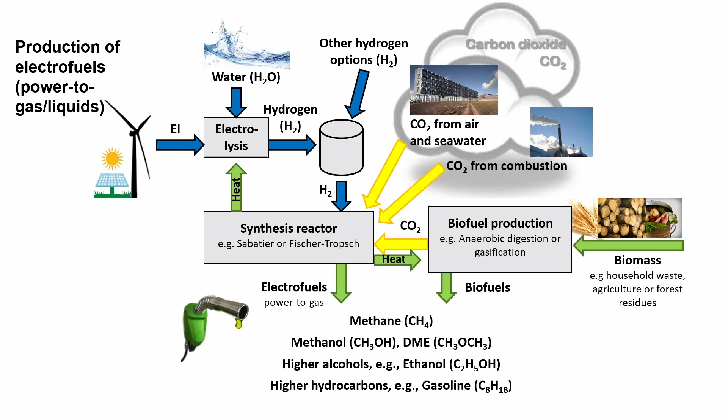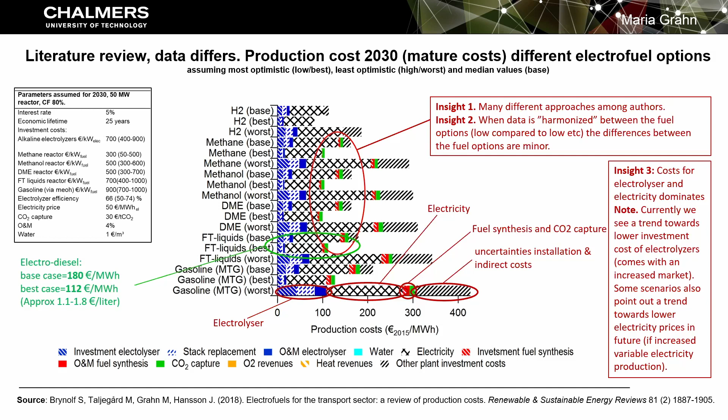And for insight 3, we can also see that those dominating costs for the electrolyzer and the electricity have a downward trend, so there is a great potential to reduce the cost in the future for electrolyzers and for electricity, which are the dominating parts.

Then in the same study we also made an analysis trying to understand the role of capacity factor. How many hours per year do you run your facility at full capacity?

So if you want to just have your facility running on what we can call free or excess electricity, maybe 10% of the year, you see that per megawatt hour of electro-methanol, it will be still a high cost per megawatt hour of the methanol, up to about 400. Whereas the more you can utilize the facility over the year, the higher the cost part, which is the electricity cost, increases per megawatt hour of produced fuels.

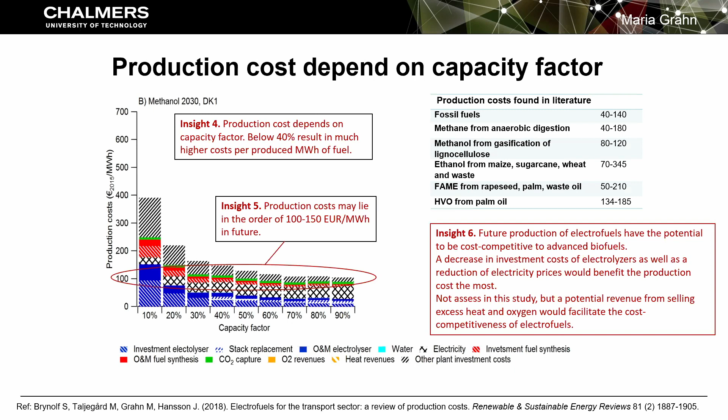But an insight is that it is relevant to have your facility running at least 40% of the total amount of hours per year to get the lower part of the production cost, and then it's phased out. So in this analysis here, around 100 euro per megawatt hour could be a future production cost. And then we compared the production cost with more advanced biofuels. So insight 6 is that we can see that they are in the same order of size as the more advanced biofuels.

So then I would like to share with you also some slides and some results from a recent study that we have done on the big picture, and that is, under what circumstances could electrofuels become cost competitive in the shipping sector? So here we are first comparing the different production costs, including also hydrogen and battery. And then we also include the total cost of ownership, so that we include the investments also in the propulsion technologies.

So what we're looking at are the combination of the different electricity sources, biomass sources, and the fossil sources for the different types of fuels, including methanol, but there are also DME and HVO and liquefied methane gas from gasification, liquefied biogas from anaerobic digestion of household waste. We have ammonia, we have the liquefied hydrogen, and we have electricity. And we combine them in 4-stroke engines, 2-stroke engines, battery electric, and also fuel cell electric propulsions.

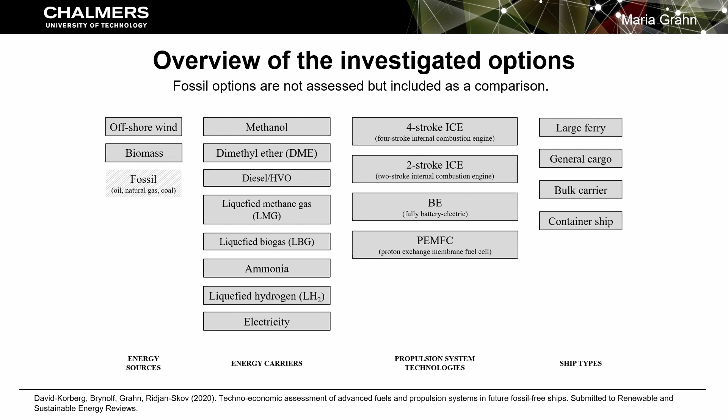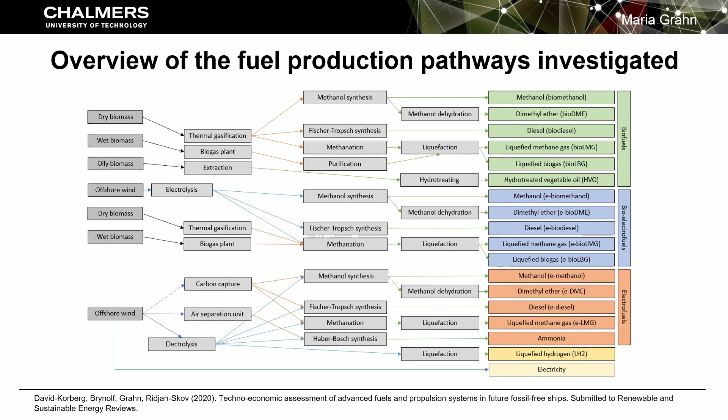And on the right-hand side, you see that we have grouped the different fuels into the green part, which are the biofuels. So we have biomethanol, and in the blue part, we have the kind of hybrid. So it's an electro biomethanol where we utilize the excess CO2 from the gasification and meet up with more hydrogen, so that we have, in the blue case, a hybrid fuel, electro biofuel. And in the more orange field here, we have the electrofuels, where we then have e-methanol as one of the options. And then we compare them also with the more yellow, in the end here, liquefied hydrogen, and also electricity in the battery electric propulsions.

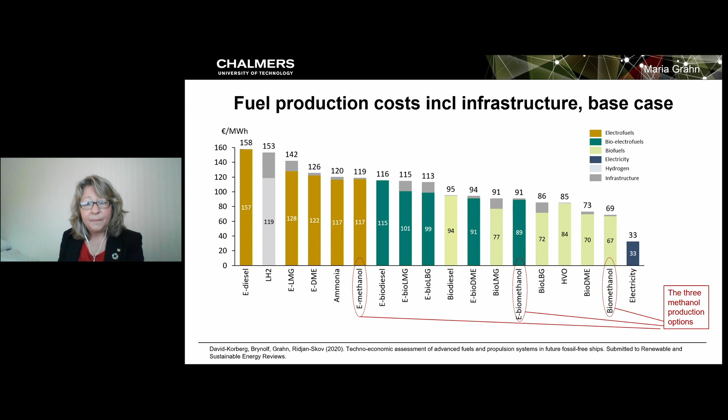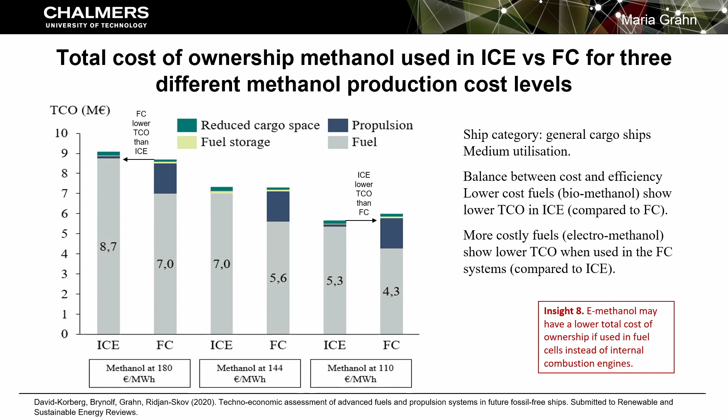On the opposite then, for the 2 last bars, if you have a cheap methanol, if you produce it from biomass, for example, then it will be the opposite, that the total cost of ownership will be lower if you run it in an internal combustion engine compared to the fuel cells, although they are not that different. But it is an interesting finding, I think. So that's the insight 8.

So very quickly, I would like also to show you 2 slides from an ongoing project that we have at Chalmers right now. So we have a hydrogen methanol case. It's an EU project called HyMethShip. So in this ship, we fuel the ship with electro-methanol. Then we have a reformer on board producing hydrogen. So hydrogen is used to propel the vessel. And then it is a possibility when you convert it into hydrogen to capture and store the CO2. And also the heat from the internal combustion engine can be used in the reforming process.

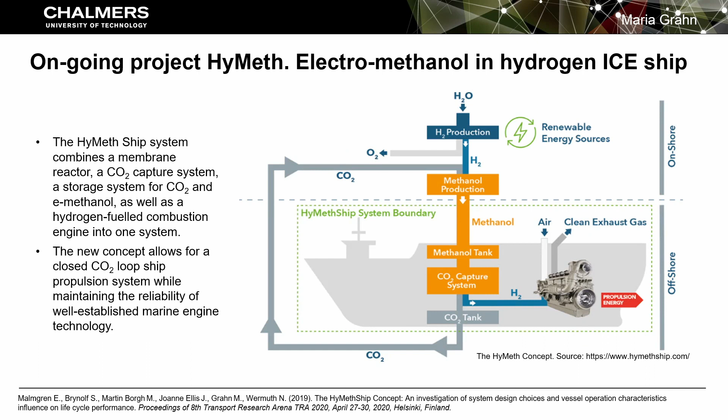So that makes more sense to have an internal combustion engine on hydrogen compared to fuel cells on hydrogen, since you need the heat for the reforming. But the point is that you can have the CO2 stored in the tank on board, and then you get to the shore and you can unload the CO2 and produce new electro-methanol. So it will be a closed loop of the CO2 in this case.

Is my time running out? I see you coming back now, Sebastian. Go ahead.

Go ahead. I have like 2 more minutes, if it's all right.

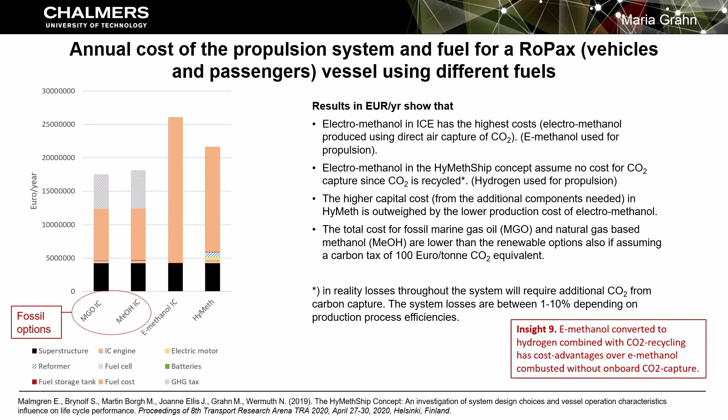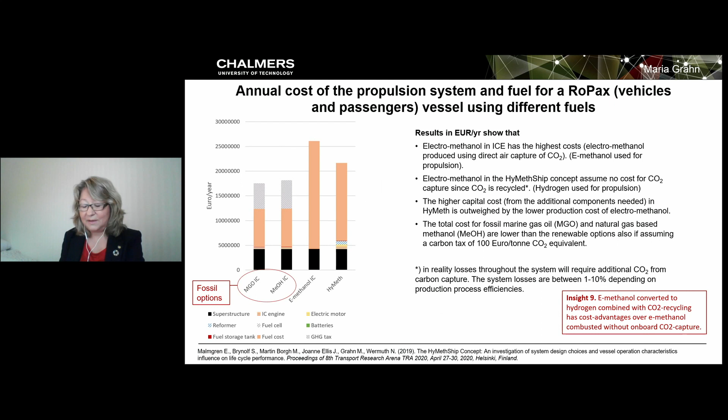And the two first bars, they are the fossil options, where they have methanol in internal combustion engines, natural gas-based methanol, but you also have the MGO in internal combustion engines. So even if you put on a carbon tax of about 100 euro per ton, they are still the lower cost options with the fossil fuels. So it's, of course, a challenge to get the cost competitiveness for these new interesting options. I think maybe I should end here.

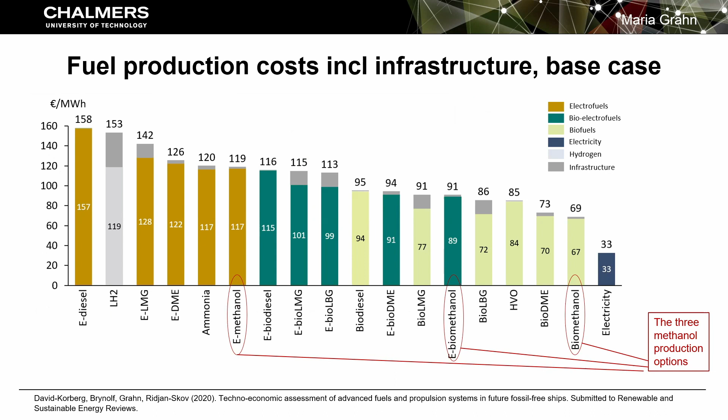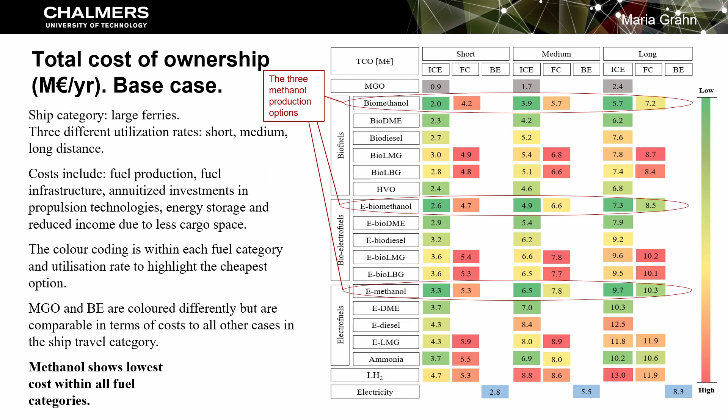Okay, thank you. And then another question for clarification, whether the TCO calculation indeed included the costs for carbon capture. Yes, carbon capture should also be included when you have the electrofuels. Off the top of my head now, I don't remember what type of carbon capture we assumed. Many times in the base case, we assume carbon capture from exhaust streams from the factories. So then it's between 30 and 50 euros per ton. I think that was also the case in this base case here, but I'm a bit unsure. I have added the references so you can read more. Great, thank you.

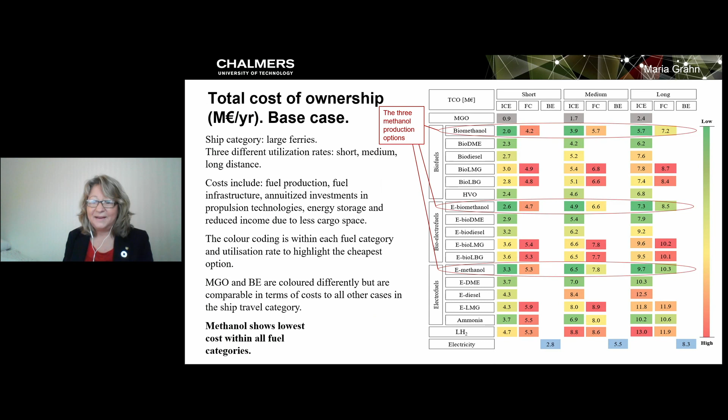Then equally important, I think, in the assessment is the efficiency estimates you took for the fuel cell solution and the combustion engine solution operating on methanol, for instance. Can you remember what efficiencies you started from there? The efficiencies for the propulsion part are relatively optimistic. I may be mistaken now, but I think it's between 45 and 50% for the internal combustion engines, and slightly higher for the fuel cells, but not much higher. Okay, thanks for that.

Then also one that's popping up quite frequently these days: we see various figures out there on the production cost of ammonia versus methanol. One of your slides showed that ammonia ends up being more expensive, whereas there are definitely also numbers around where the opposite is shown. Do you have any insights as to what causes the difference and what's probably the right answer?

Yeah, we were surprised that ammonia was so close to the other more common options, such as methanol. It could be, from a cost perspective, a good case for ammonia. And as we also mentioned before lunch, we don't see them as competitors. We see them as complementing each other towards a fossil-free transport sector. So we welcome, of course, improvements on the other challenges that are not cost-related. But I don't remember now why exactly they are slightly higher for ammonia compared to methanol.